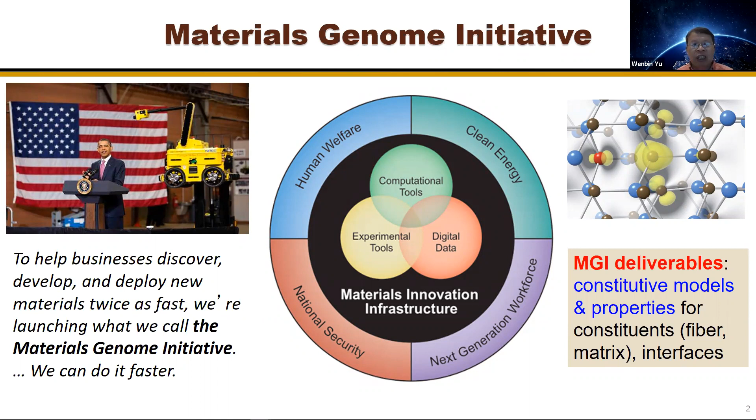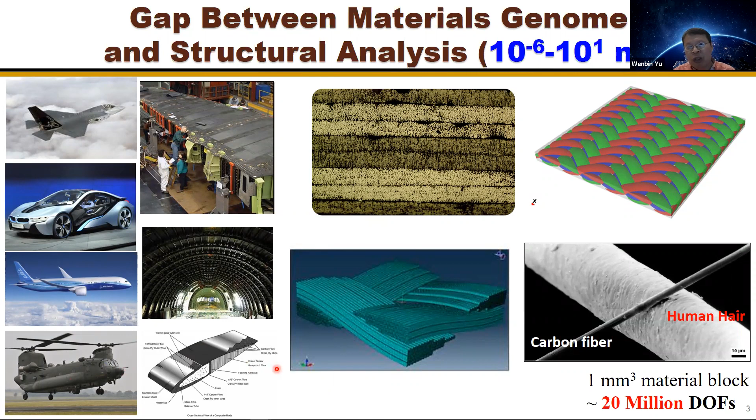If you're familiar with finite elements, it's even hard to cross two length scales. For example, for a 1 millimeter material block, if we want to capture fiber details, your element size cannot be more than the fiber. Then you're talking about millions of degrees of freedom. But here we need to cross many length scales, from micron to meters. And we also know that structure behavior is directly affected by how we engineer the fibers. So we need to find an effective way to bridge the gap between the materials genome and the structure analysis. Let me use an example.

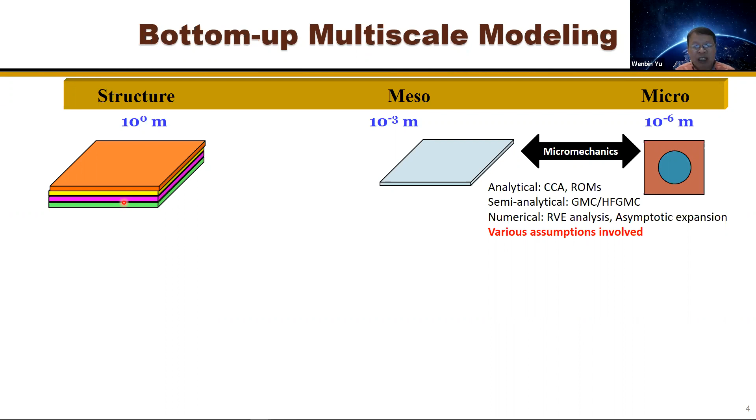Traditionally, for example, for fiber reinforced laminates, we have so-called bottom-up multiscale modeling. We start from some kind of unit cell idealized representation of the material mixture, then use certain micromechanics calculation, could be analytical, semi-analytical, or numerical, to get so-called nominal constants. Then use some structure theory, the most popular one is the classical lamination theory, to construct the structure theory, then do the structure design analysis. Both micromechanics and structure mechanics are two separate subjects, and we have all kinds of models there, and also various assumptions involved.

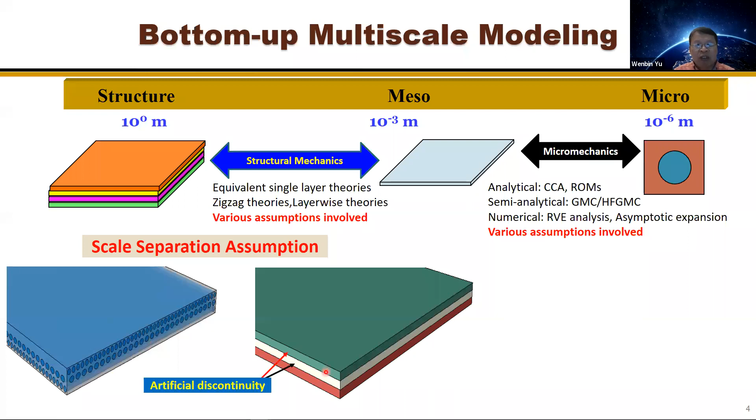And the more fundamental assumption is what I call here the scale separation assumption when you do this two-step micromechanics and structure mechanics. For example, you have a unidirectional fiber reinforced composite with perfect bonding. If you do it this way, basically you effectively replace the original structure with a structure made of 3 homogeneous layers. Then you shift the discontinuity interface. Originally the fiber and matrix interface now becomes the layer and layer interface. We create a so-called artificial discontinuity. It would be okay if the fibers are much smaller than each layer thickness, which is true for traditional prepregs.

We have about 20 fibers within the layer thickness. Then for the global behavior, stiffness, vibration modes and buckling, that would be okay. But it would not be okay to get the stress concentration because even the material discontinuity is different. And that's why for structural behavior, for stiffness consideration, the classical lamination theory does a good job there.

But when you go to damage and failure, because damage and failure is a local phenomenon, then we have difficulty to have a good prediction. And also for some situations, even the global behavior will be wrong. For example, we have a honeycomb in the middle, a sandwich structure with face sheets in terms of laminate.

Then the traditional way, if we use the bottom-up multiscale modeling, we take a unit cell, do a micromechanics calculation to get the material properties for that honeycomb. Then we treat it as a homogeneous layer to do a sandwich structure analysis. And it will have some issues even for the global behavior. The reason being that the size of the honeycomb is similar to the thickness of the panel.

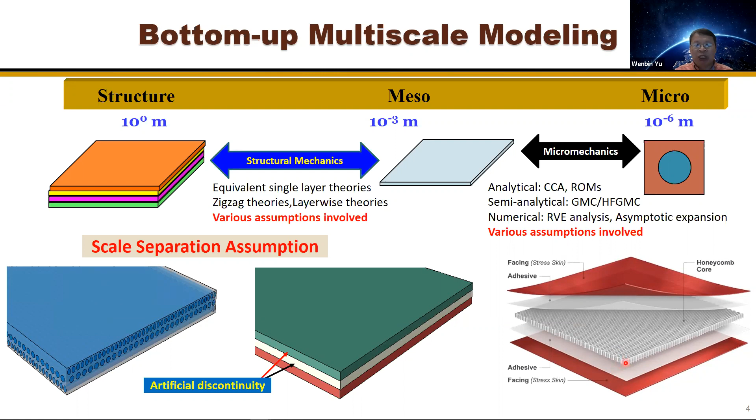So when the scale separation is not clear, it's not at the 3-dimensional material level, but at the panel level, which means the thickness and the size of the microstructure should be considered together to do the homogenization. And this kind of bottom-up thinking sometimes also confuses structure behavior and material behavior.

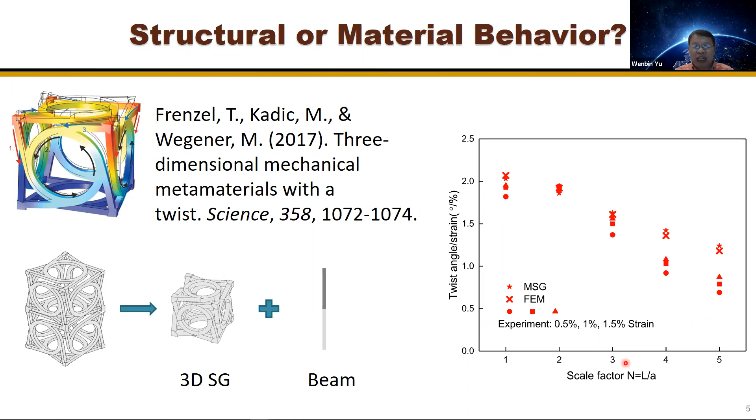So to avoid the issues associated with bottom-up multiscale modeling, I have been searching for a top-down modeling approach from the system perspective. Fundamentally speaking, for a structure, no matter how complicated it is, it basically comes down to structural analysis. It's a combination of 3D solids, if all 3 dimensions of that component are of similar size,

or plates and shells, if we know some component has 1 dimension much smaller than the 2 other dimensions, and also beams, if we have 1 dimension much larger than the 2 other dimensions, or thin-walled beams, if all 3 dimensions are of different orders of magnitude. And this is basically our mathematical idealization.

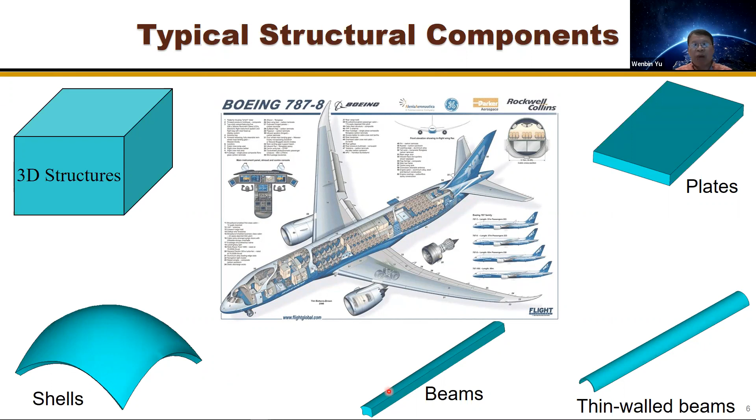When we do the analysis and design, we discretize them as a combination of solid elements, plate and shell elements, and beam elements. And what we have to realize is that this single line element could represent a box beam with each wall made of, say, 20 layers of woven fabric. And this 2-dimensional plate surface element here could be a stiffened panel with skins and stiffeners made of composites.

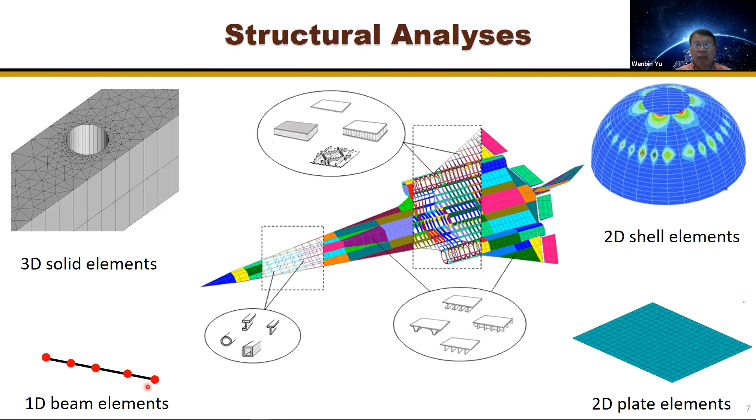And what we need to find out is how we can capture the behavior using this much simplified mathematical representation. And that is what we call the models. Behind each element, there is a corresponding model. If you're familiar with continuum mechanics, for each structure model we have 3 parts of equations: kinematics, kinetics, and energetics. Energetics is also called constitutive relations.

The kinematics and kinetics will remain the same, whether it's made of composites or not. What will be different is the constitutive relations. Here I only use linear elastic behavior for illustration, and it can go to nonlinear. What I have to point out is that for composites, particularly anisotropic heterogeneous materials, the stiffness matrix could be fully populated. For example, for beam theory, we all know EI, GJ, EA, these kinds of beam constants.

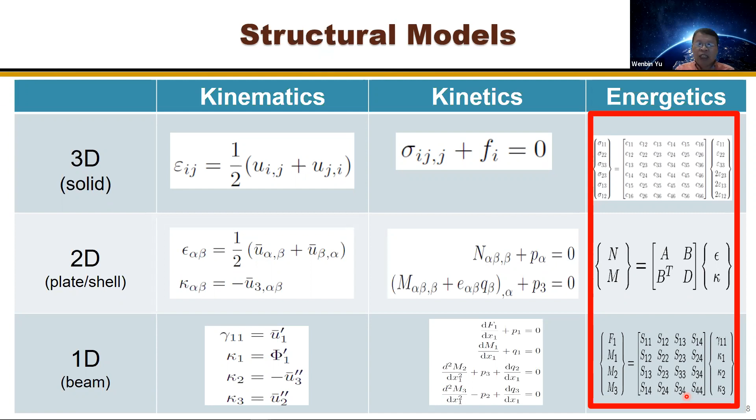But for a composite beam, we could have a fully populated stiffness matrix. All the deformation modes could be coupled. So composite modeling should focus on the constitutive relations. And the way to find the constitutive relations is what I call constitutive modeling, because kinematics and kinetics have already been implemented many times in commercial finite element codes. So the mechanics of structure genome is what I proposed as an alternative to traditional multiscale modeling.

What we do is first we decide what kind of model I want to use to describe my relevant structure behavior I want to capture. Then I decide at which level I characterize my material. Then we need to come up with some method, what is called here mechanics of structure genome, to minimize the information loss between these 2 representations. And some of the theories we developed are implemented in the code called SwiftComp.

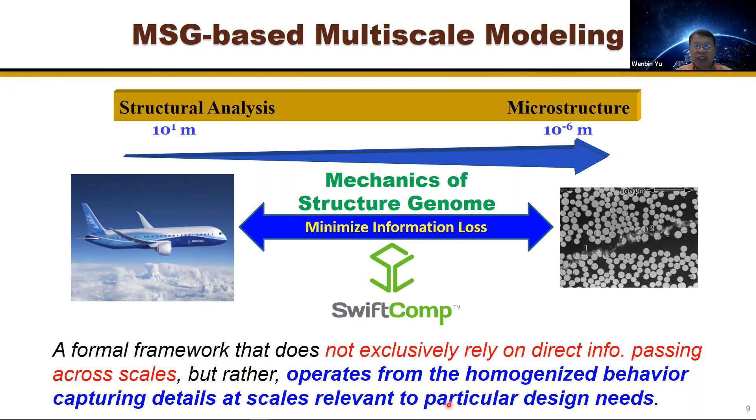It is a formal framework that does not exclusively rely on just direct information passing across scales, but rather operates from the homogenized behavior, capturing details at scales relevant to the particular design needs. This flowchart shows the MSG-based multiscale modeling. We start from the 3D continuum mechanics model. First, we identify the structure gene.

Then we use the principle of minimal information loss to mathematically decouple the original problem to a constitutive modeling over the SG and also a structure analysis. The constitutive modeling over SG produces the constitutive models for the structure analysis. The structure analysis usually has been done by standard finite element codes like Abaqus, Nastran, and ANSYS. Then structure analysis gets the global behavior: vibration, buckling, deflection, all that.

But what we want to find is how the material feels. Then we need to go back. There is a so-called dehomogenization procedure. We still get the relationship from the constitutive modeling. Doing a dehomogenization, we will find out what happens within the material, within the microstructure.

Then you'll find out that to use this method, there are 3 questions we need to ask and answer. First, what would be the macroscopic model? That depends on design need and how the structure looks. For example, for a helicopter rotor blade, you want to use beam elements to represent the composite rotor blade when you do a dynamic simulation.

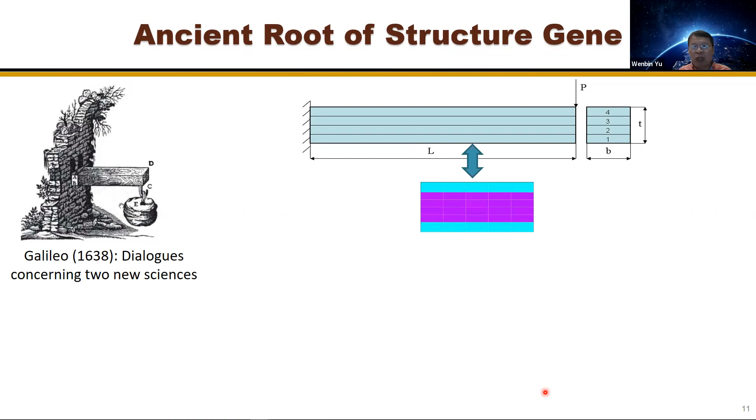How do we deal with beam theory? We know all the structures in our 3-dimensional space are 3D solids. We start from the 3D structure. We basically look at the cross-section, traditionally make some assumptions, then do some cross-sectional calculation to get the beam constants. Then we reduce the original problem to a set of ODEs to do the analysis. For example, this is the deflection, the bending analysis, for the global beam analysis.

After we've done that, we don't stop here. We do this analysis, we get displacements, rotations, and the forces and moments, bending moment diagram, shear force diagram. If we want to say whether the material is strong enough or not, we use a formula like this. Everybody knows this formula to get the stress, to check the maximum stress against the design allowables. So that's the procedure we all know.

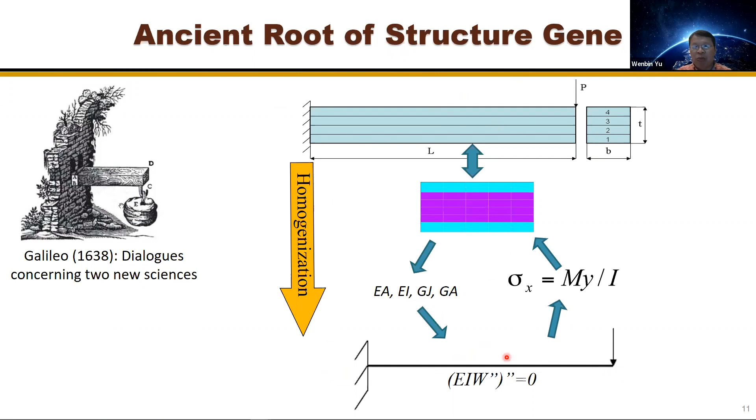If we talk in terms of the language of MSG, then basically the way we calculate the beam constants, EI, GJ, that's a homogenization procedure. The original model is a 3-dimensional model, and the macroscopic model is a 1-dimensional model. We want the effective properties, that's homogenization, and we get the global analysis here.

And then the way to get sigma, the stresses, is a dehomogenization procedure. We go back to the SG, or you can call it the microstructure, to get the local fields or distribution over the cross-section. And this shaded area is what I call the constitutive modeling.

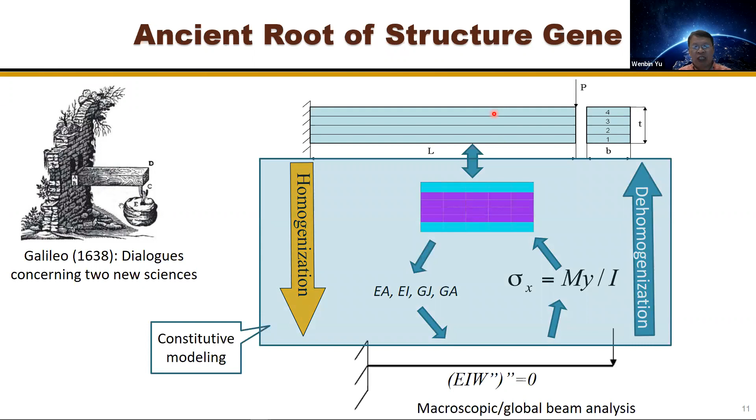So next, let me show the basic steps of MSG to construct a theory. It's very simple. We only need to follow 3 very basic steps, because we're thinking in terms of 2 models. We have our original model as the starting point, but that's too complex and too expensive to work with. We want simpler models. That's basically what multiscale modeling is about.

The first step is to express the kinematics of the original model in terms of that of the macroscopic model. So the displacements can be expressed in terms of, say, the displacements and rotations of the beam model, right? And then you can get the kinematics.

The strains of the original model can be expressed in terms of the beam strains and curvatures, and also some unknown function. Usually in micromechanics, we call it the fluctuating function. Then we express the information of the original model. If we're dealing with linear elastic behavior, we're talking about total potential energy. So we express the total potential energy of the original model in terms of the kinematic variables of the model I want. You still have the unknowns.

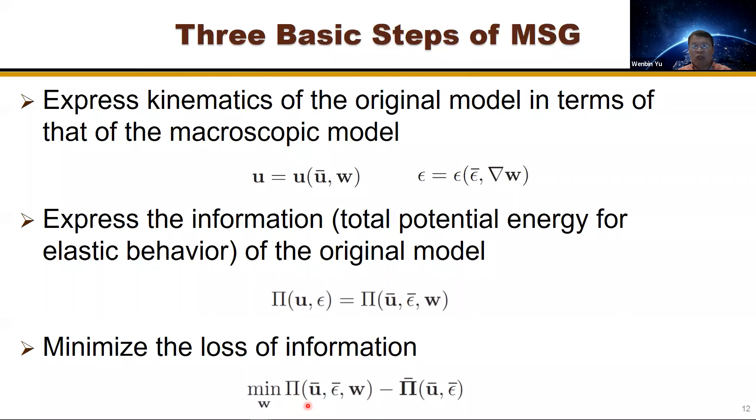How do we find that unknown? To minimize the loss of information between the information of the original model and the information of the model I want. Then you minimize it, then you will find out the unknowns. Then you solve the problem. You have the exact relationship between these two models, without really a lot of the ad hoc assumptions we have involved in structural mechanics and micromechanics.

So now let me illustrate more about the structure gene concept. For example, for 3D analysis, it depends on your material makeup. It could be basically a binary composite made of layers, but it's a 3D solid. You want to do a 3D analysis. Then your structure gene will be just a normal line with the segments indicating how many phases you have through the thickness. If you only have this binary composite made of 2 layers but repeating, then you only have 2 segments there.

If you have unidirectional fiber reinforced composites, you're dealing with a 2-dimensional domain. Remember, it's the smallest mathematical building block, because I can take this 2-dimensional domain, extrude along the fiber direction to build that slice, then sweep along the layer direction to build the entire layer, then build through the thickness. So that is the smallest mathematical building block. If you indeed have 3-dimensional heterogeneity, then you have to deal with a 3-dimensional domain. And that's a similar concept to the RVE, but I will tell the difference between this and RVE.

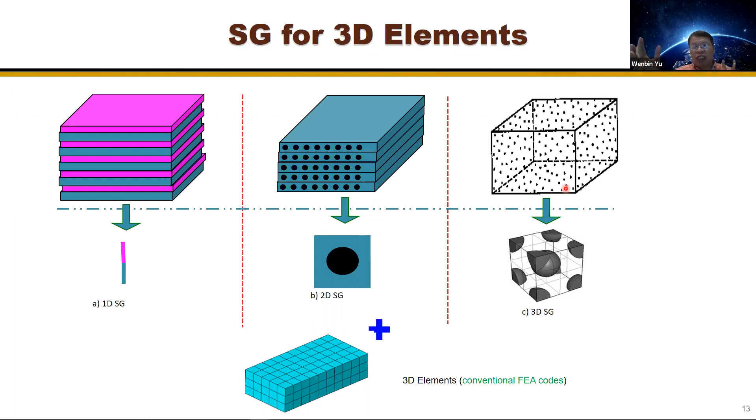And we carry out this 1-dimensional, 2-dimensional, 3-dimensional analysis. We will get the constitutive models. For example, if linear elastic, we'll get a 6x6 stiffness matrix for the structure analysis. After you've done the structure analysis, we can carry out the dehomogenization to get the detailed stress distribution within the original material. So this is kind of like a generalized computational homogenization method, but much more powerful than the RVE analysis, particularly for some of you, if you're familiar with RVE analysis.

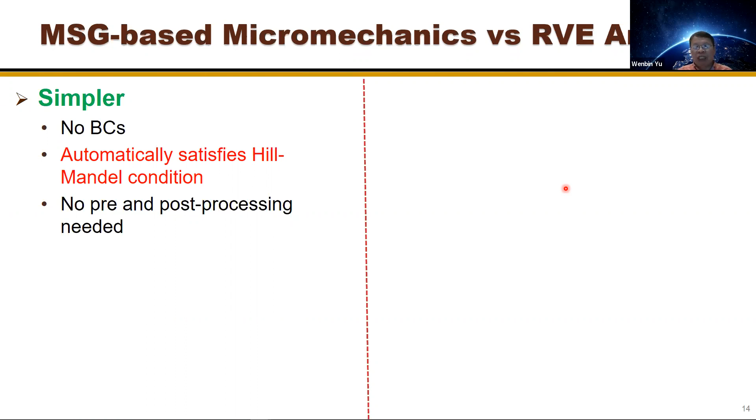I did a comparison. First, the users don't have to apply the boundary conditions. When you do RVE analysis, the most challenging part is to apply the correct boundary conditions. And also, our theory automatically satisfies the Hill-Mandel condition, and we can prove that. And also, there is no pre and post processing needed. For RVE analysis, we take a block of material, apply the right boundary conditions in terms of tractions and displacements, then we do a stress analysis, right? Then we average the stress, average the strain, and calculate the material properties. That's what I call the pre and post processing.

And it will be faster because it's semi-analytical; we had many examples showing that this method converges faster than the RVE analysis. And also we have the capability to compute 3D properties and 3D stress and strain fields out of a 1-dimensional, 2-dimensional, or 3-dimensional SG. For example, people also take a 2-dimensional domain to do RVE analysis, but they can only get the in-plane properties, and they can only get the 3 stress components. This method can compute the complete set of 3D properties using one analysis.

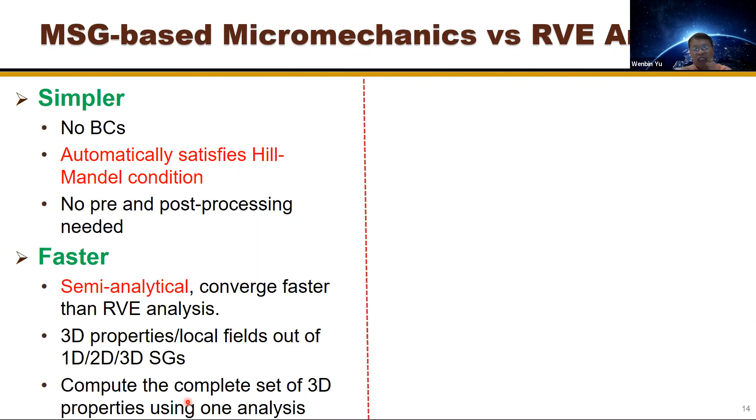We directly compute the stiffness matrix, or tangent stiffness matrix for nonlinear analysis. Not like RVE analysis, where you apply a certain set of boundary conditions, do a calculation, get the material properties in that direction, that column, then do another analysis to get it in another direction. We only do one analysis. For example, for the fiber reinforced composite, if you look at a lot of other multiscale codes, they will have this picture showing how they do their RVE analysis. But if you use MSG, this 2-dimensional domain will be sufficient, and we will generate the same result.

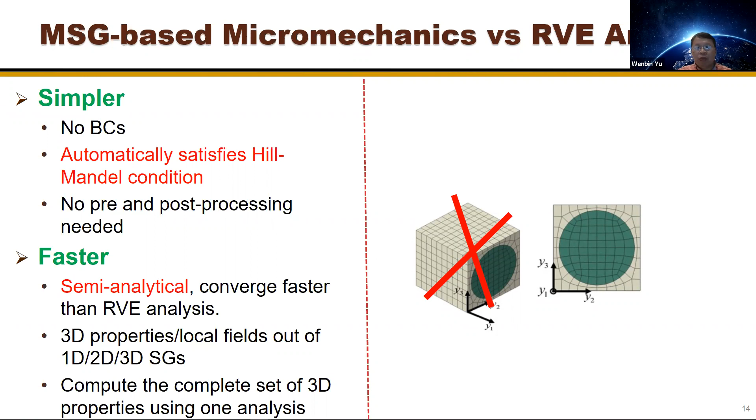And it's also more versatile; it's a single theory for all heterogeneous materials: periodic, partially periodic, or aperiodic. And also, it does not have to be a rectangular shape. It can be an arbitrary shape, depending on your material. You may have this kind of microstructure. And we find that for 3D periodic materials, it will achieve the same accuracy as RVE analysis and asymptotic homogenization, if you've heard about it. But for partially periodic or aperiodic materials, it will always achieve the best accuracy, because we use the principle of minimal information loss; we make sure that the homogenized model and the original model have minimal information loss.

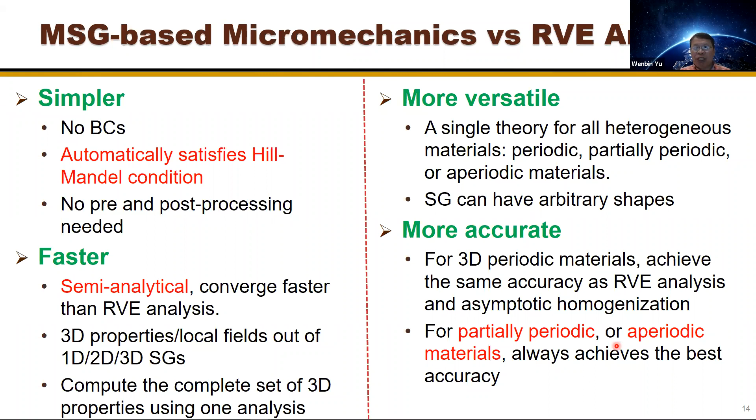And I have a simple illustration here. Usually this is not done through the traditional micromechanics lens, but if you view this problem using MSG, actually that's a micromechanics problem, the black aluminum approach.

We treat a stack of laminates as a homogeneous material, kind of like a black aluminum. Then the conventional approach, how they do it, they basically use the classical lamination theory to get the A matrix, then get your in-plane properties. Then for the out-of-plane properties, they do various assumptions through the thickness, then calculate the transverse Young's modulus, Poisson's ratio, CTEs.

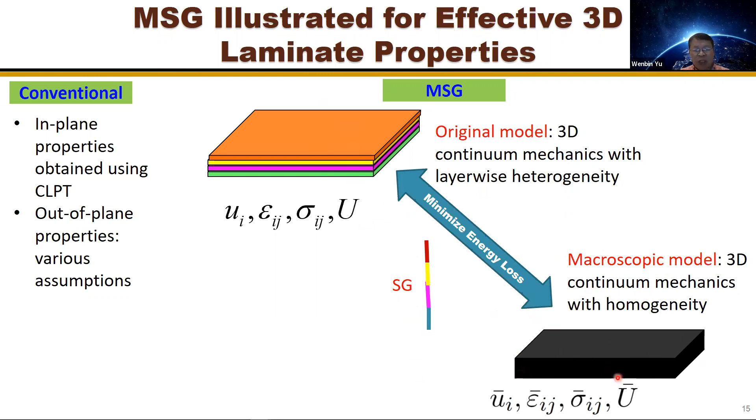And if we use MSG, we need to answer the question, what would be the original model? Our original model would be 3D continuum mechanics with layer-wise heterogeneity. And the model I want is a 3D continuum mechanics model with homogeneity. And the structure gene I have is the transverse normal line. That's basically what I have, because I can use this to build the entire structure. Then we minimize the energy loss. We can get the full set of the 3D properties for this homogeneous material without making various assumptions.

How about when we have a structure like a panel that also has a lot of heterogeneous details, and we want to analyze it using plate and shell elements, say for example a bending problem or buckling problem? Then it depends on how this structure is made. If it's made of homogeneous layers, then the SG will be the transverse normal line, because that is my smallest mathematical building block. I can use this line, sweeping in plane, to build that three-dimensional structure. If we have heterogeneity along one of the in-plane directions, I'm dealing with a two-dimensional domain. If I have heterogeneity along both in-plane directions, I deal with a three-dimensional domain.

What I want is the plate models for the plate analysis. If you're talking about the simple plate element, you're talking about the ABD matrix as input to do your structural analysis. So out of this one-dimensional, two-dimensional, or three-dimensional calculation, we will get the ABD matrix. Then you do your plate analysis, then you go back and get all the stress components you need within the original structure.

And there are a few things I want to point out. First, this method provides a uniform theory for all panels. Here I only use plates, but shells also can be done in a similar way, no matter whether it's sandwich or laminates or corrugated structures or stiffened panels. In the literature, people have different theories, but here it's treated uniformly.

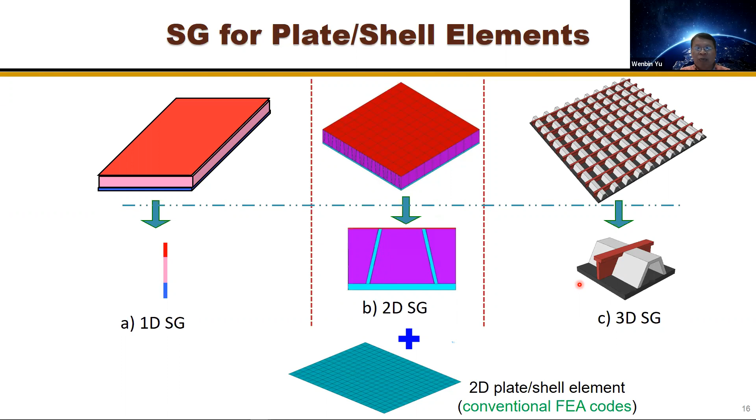For example, I still use the same problem, a stack of laminates. Now I know that if I treat it as black aluminum, I cannot take care of the flexural properties, the bending. So what I do, I want a plate model. Your starting model is the 3D elasticity model with layer-wise heterogeneity. Your end model is a two-dimensional classical plate model. And your structure gene is still the transverse normal. And you minimize the information loss. At the end of the day, you will derive this model with the plate stiffness.

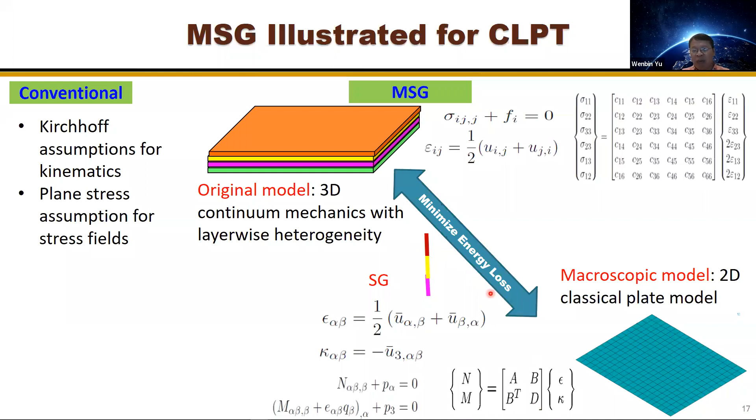Traditionally, we take the Kirchhoff assumption for kinematics, basically generating a plane strain situation. Then we do a plane stress assumption. Instead of using C, we use Q, right? Sigma ij equals Q ijkl epsilon kl. But we do know that plane stress and plane strain cannot exist at the same time; they contradict each other. For this method, we don't have to make that assumption. We just need to minimize the loss of energy between these two models.

How about if we have a very long structure, for example, helicopter rotor blades? If we have a uniform cross-section, or the blade can be considered as formed by piecewise uniform cross-sections, then the structure gene will be the cross-section. And if we also have heterogeneity along the spanwise direction, we're dealing with a three-dimensional block. What we want is torsional stiffness and bending stiffness for my beam models. So that will be done at the one-dimensional level.

After we've done the beam analysis, we can do dehomogenization to get the stress distribution over the cross-section or over this three-dimensional SG. And again, if you have a structure that is very long and you want to model it as a beam using beam elements, then this method will help us produce the right beam constants for you to use, and also recover the local fields to generate the three-dimensional stress.

And as I said, plate and shell theory, and also beam theory, is a very traditional structural mechanics theory. But if we view this line as a one-dimensional continuum, then for every material point on this line, you have a corresponding microstructure to generate the effective properties. They are effective beam properties, and also help us to generate the local fields. So the beam theory also becomes a special application of micromechanics in that sense.

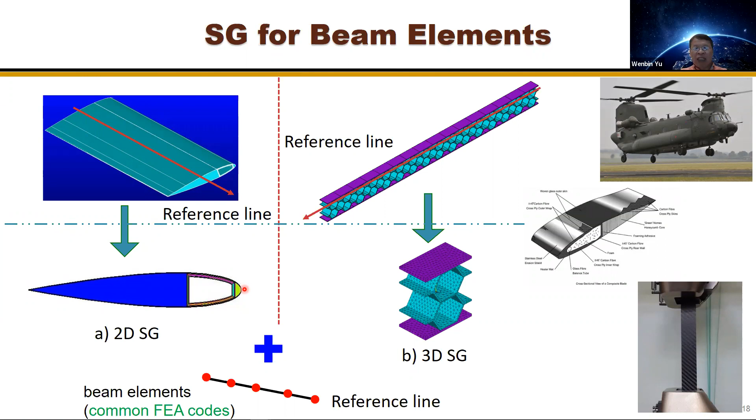And some of you, if you have been following my work, know I actually started with beam theory when I was a PhD student at Georgia Tech with Dewey Hodges, solving the helicopter rotor blade problem. So on beam theory, basically, we worked a lot. We almost completely solved the problem, actually, because it has been funded by the U.S. Army since 1988. We are still funded by them to basically make it into their framework. Later, I will mention it, into their framework to do the design. And it now becomes the tool of choice for the helicopter industry and the wind turbine industry.

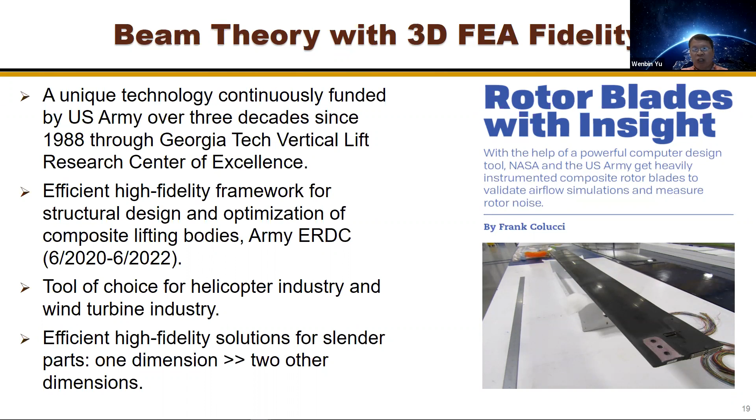It also provides a very efficient and high fidelity solution for very long parts, cylindrical parts, as long as we know one dimension is much larger than the two other dimensions. This is a very recent article. They used our tool to design a blade for NASA. That's about the theory. Now let me show a little bit of applications.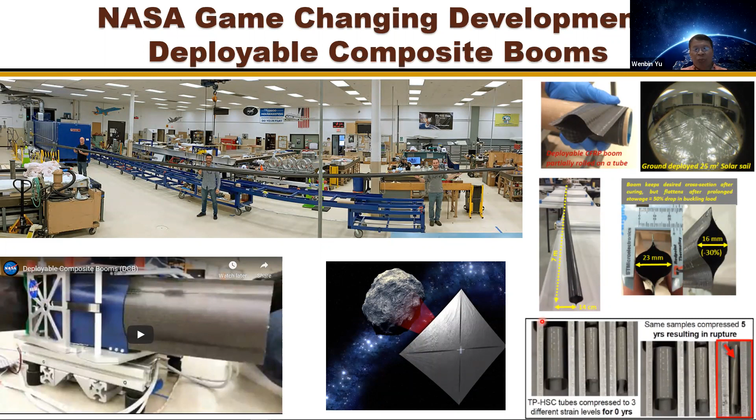Current active projects apply this method to various types of structures. So the first one is the NASA Game Changing Development, that is deployable composite booms. And you can see that it's a very long structure, and when it's deployed, basically it behaves like a beam. But when it's stored, they are basically plates and shells contacting each other. So that's from the structure perspective. But if you look at the details, it's made of composites, woven composites, simple composites, and viscous behavior is important, damage and loss of energy is important, and also distortion is important. Supposedly after you deploy it, it must be straight, but if it's not straight, then the effectiveness of your space structure will be affected.

And we came up with a multiscale approach to tackle this problem. We can start from the fiber and matrix. The viscous effects really come from the matrix, and go step by step there. And at the end of the day, because the structure is so thin, when they do the characterization, they use the column bending test to test the bending and curvature behavior. And what we want to compute is this bending behavior in terms of fiber and matrix. And that's a simulation we did for their CBT, kind of like a virtual twin of that test, virtual testing from that perspective.

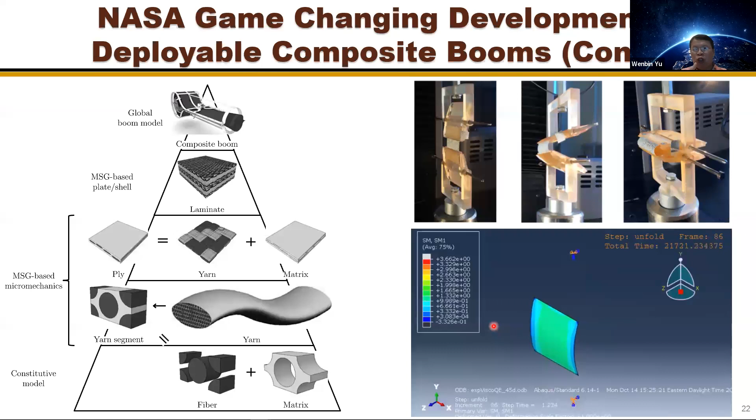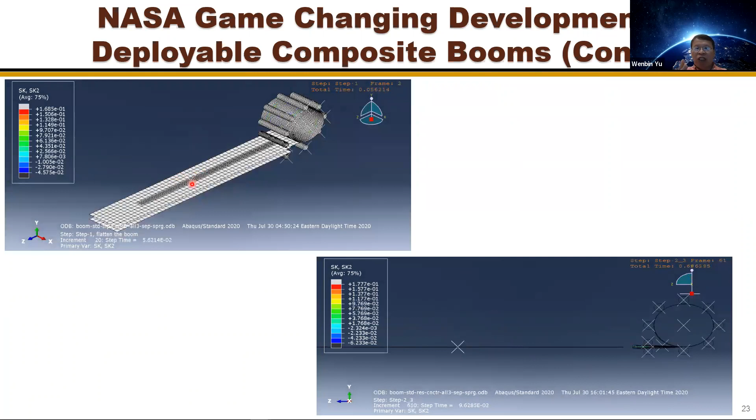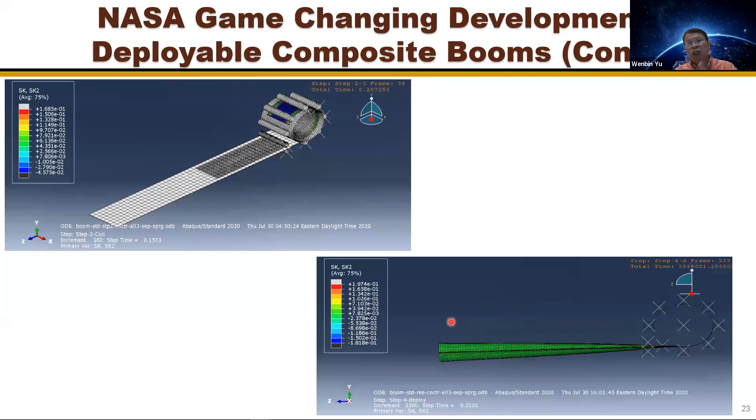We also did a simulation of the entire process in terms of the rolling, storage, and also deployment. The deployment is a little bit slow here, and we will wait for a minute. So what we did is, in terms of the fiber matrix properties, we can compute the nonlinear plate and shell stiffness, then treat it as a UMAT, then put it into Abaqus to do the simulation. For the elements, we still use Abaqus shell elements. And this is deployment. And I think this kind of digital model corresponding to the real test or the real structure can be very valuable to explain things and also to reduce the number of experiments we need.

And there's another one. This is very new. If you look at multiscale, there is an inherent problem. Basically, at the global level, the material is treated as a point. But we know that the RVE or SG is not a point. It has a finite size. So because of that reduction, we always need to implicitly assume so-called local periodicity. At one point, in the neighborhood, you should have similar RVEs repeating. Otherwise, it's not a material. You cannot use RVE analysis. But we do have situations where we don't have this nicely arranged RVE repeating everywhere. And a lot of the time, basically, the heterogeneity is everywhere, and they are different.

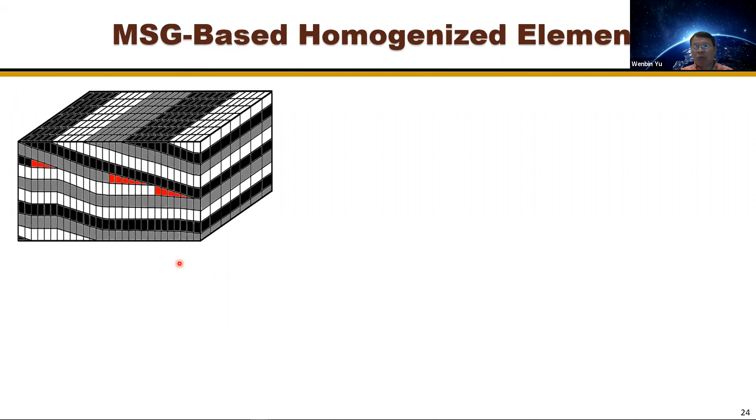For example, the composite flex beam has a lot of ply drops, and we need to get detailed stress. And if we do a detailed FEA analysis, it's impossible. A flex beam is pretty thick. You have hundreds of layers. If you want to get accurate stress, you need quite a few solid elements per layer to do the analysis. A certain type of multiscale is needed, but the RVE does not exist, or the SG doesn't exist. We don't have the so-called smallest mathematical building block. So we came up with the idea: how about homogenizing that block of heterogeneous material into a homogeneous solid element.

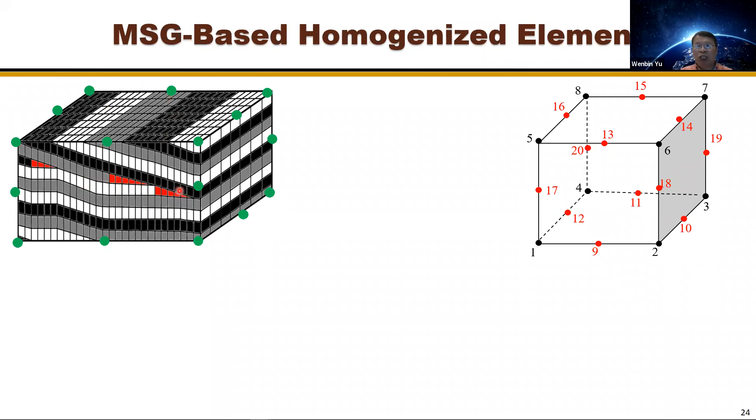This element is a global element I used in the global analysis, but it contains all the heterogeneity. So basically, this is my original model. We still can reason using MSG. This is my original model: the heterogeneous system discretized with many elements. And this is my macroscopic model. It's a single homogeneous element. Here it's a 20-node solid element.

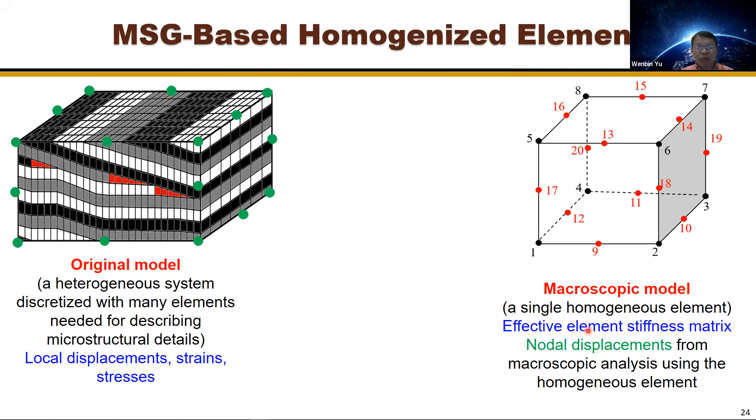I want the effective stiffness matrix so that I can do the simulation to do the global analysis. But this will help us to get local stress and strains. Then I can do homogenization to get the effective properties. For this purpose, it is the effective element stiffness matrix. It's not a material stiffness matrix anymore. For example, for a 20-node element, you're talking about a 60 by 60 stiffness matrix.

And after you've done the global analysis, you do a dehomogenization and get all the local stress within the original material. You apply your failure, whatever local buckling criterion at that level. So what we need to do is minimize the loss of energy between these two systems. I had a few equations, but I will not bore you with this. Basically, still the same idea, express displacements in terms of the displacement of the macroscopic model. For this purpose, now it's the macroscopic nodal values.

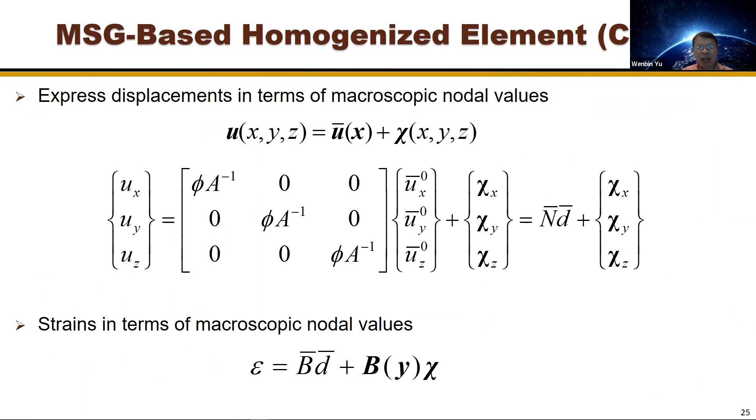And I have some unknowns, then I can get the strains, and then I can write out the strain energy of the original heterogeneous system and express it in terms of the nodal values of the homogeneous system. And I can minimize the energy loss, then solve for the unknowns. And here, of course, we need to apply some constraints. Constraints first for the macroscopic nodes, these nodes here, because that's the global element. And the real displacement should be the same as what we calculated in the global structure.

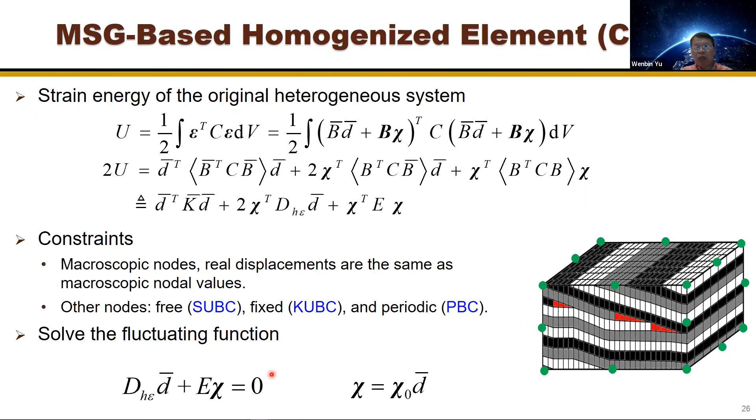And then for the surface, these nodes are not captured in the global analysis, so there are several ways to apply it. It depends on your situation. If it's a stress-free, free surface, then we should let it free. If it's connected with another surface, we need to use the so-called periodic boundary condition. In such a way, we allow it to vary in certain fashion in terms of the global nodes and also shape functions, so you have additional flexibility there. After we do the minimization, we solve a linear system.

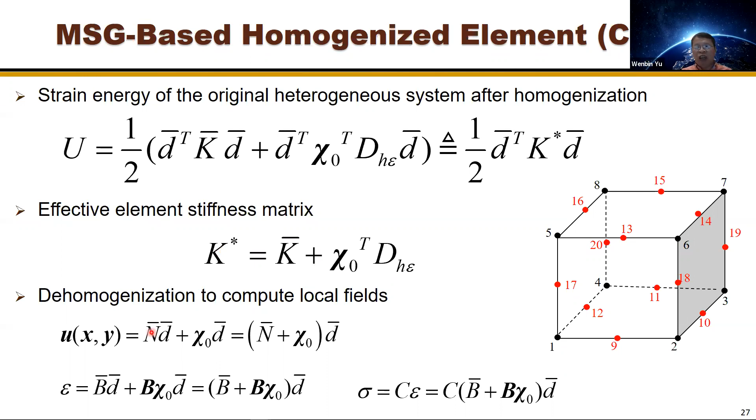Then plugging it back into the energy, we'll find this energy of the heterogeneous system expressed in terms of the global nodes. And that is the 60 by 60 stiffness matrix I'm talking about. After you have the effective element stiffness matrix, you can use the user element in Abaqus, put that stiffness matrix into that user element, then you can carry out your analysis. After your analysis, you will get the global nodal values. You can go back to do the dehomogenization and get the local stress and strains.

And we did a very simple example, a three-layer composite cantilever beam. We have a complex loading at this end and it's cantilevered here. It's made of composite resin and some isotropic material. Of course, this is simple enough; we can use hundreds of thousands of elements to do the three-dimensional analysis. We can also simplify it by using 40 MSG-based UELs only. So I take a chunk of material here to compute the effective stiffness matrix, and because they have the same makeup, the homogenization only needs to be done once. Then do the global analysis, then the dehomogenization to get the stress.

And we know that when we do this homogenization, usually we cannot handle the boundary very well. What we can do is keep the boundary using the original discretization, and only replace the middle part with this new user element. Now I have 32 MSG-based user elements and also these regular solid elements. For the results of this problem, we did a DNS, which meshes everything with a very fine mesh. Pure UEL means 40 UEL elements. Partial UEL means the two ends are the DNS part and the middle is UEL.

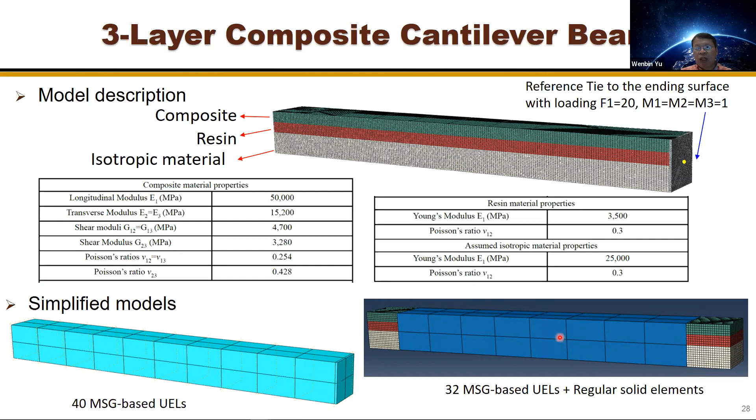And the results I take are here, very close to the boundary. Actually, if I take it close to the boundary, then they are the same, but pure UEL will be very different. I take this section here, close to the boundary but already homogenized. We find that pure UEL does a good job, but not for the very small transverse stresses. For the in-plane stresses, both approaches work okay. But the transverse stresses, although small, could be very important, for example for delamination. And when we use the partial UEL, it's significantly improved.

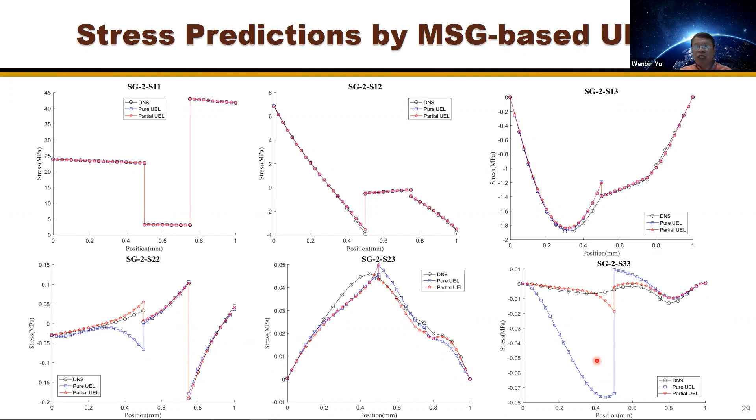It's very close to the DNS, but the pure UEL has a pretty significant difference. So this method really works pretty well, and we are happy about that. And also another issue about multiscale modeling is, when you look at that, we can link from fiber to the structure behavior. That's good and cool.

But if you look at our inputs, we need fiber and matrix properties and the failure criteria and also the microstructure. Those are the assumptions. And usually it's very difficult to measure the full set of fiber properties, right? And also when we do that link, although the structure analysis is pretty efficient, the multiscale analysis is still pretty expensive. Although our theory basically came up with the most efficient approach, it's still time consuming.

So there are a few limitations: computing time and the unknowns of the constitutive models and properties for the constituents and interfaces, and the geometry and topology of the microstructure. That's where machine learning can help us. It will help us reduce the time: we do scientifically guided physics-based multiscale modeling, then construct surrogate models trained by machine learning. That's most of the machine learning work others have been doing, basically coming up with a better surrogate based on data. Data could be high fidelity physics-based simulations.

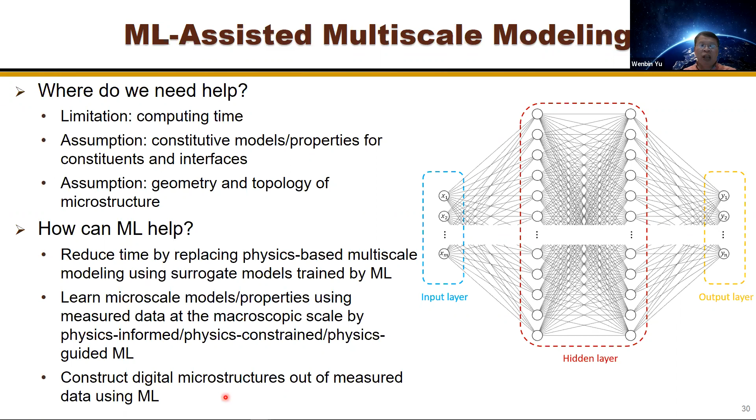Secondly, to learn these microscale models and properties using measured data, but measured data is not at that scale, but at the structure scale. And we can use physics-informed or physics-constrained or physics-guided machine learning. Also, we can construct the digital microstructure out of the measured data using machine learning. So we have been focusing on understanding the unknowns, particularly the failure criteria. We have Hashin, Tsai-Wu, but they are all assumed. They may fit a bunch of data, okay, but their predictive capability is very limited.

So what we do is, based on the experimental data, we try to link the system from the experimental data. And we link in such a way that if we know there is existing physics, I will use a physics model to link. If not, then I will use an ANN, artificial neural network, to link it. We could have multiple ANNs and also multiple physics models. Let me use a very simple system to illustrate. For example, I did an experiment at my laminate level. I want to figure out the failure criteria at the lamina level.

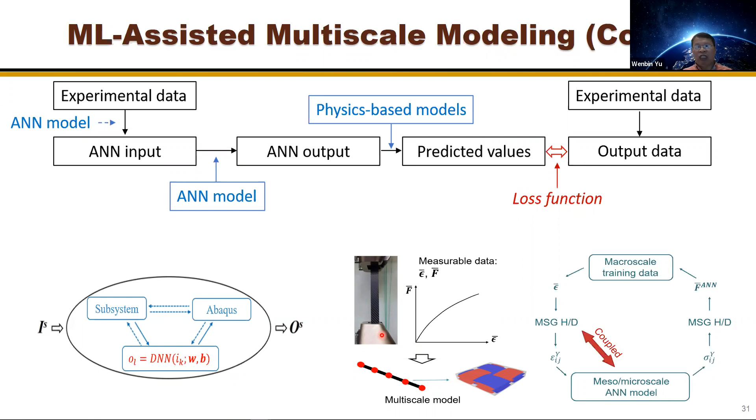Usually I can have some kind of UMAT that plugs into Abaqus if I know my failure criteria. If it isn't implemented in Abaqus yet, then I will implement it as a UMAT. Then I can do the simulation and match the experimental data. What we are doing here is that I try to replace that UMAT with the ANN, the neural network, to be trained by the data measured at the global level. That is the case because we don't know the UMAT. I don't know the failure criteria. So it's a black box, the ANN.

Basically what we did is that we take this machine learning TensorFlow kind of package apart, and use what we needed. So we express the constitutive relations using a neural network. We don't know it, it's a black box, a free-form assumption, if you want to call it. There are weights and biases. That's what we need to determine by system level measurements. So system level measurements are passed through Abaqus, and there are sensitivities, so basically Abaqus and the ANN should constantly communicate with each other so that we can train the model.

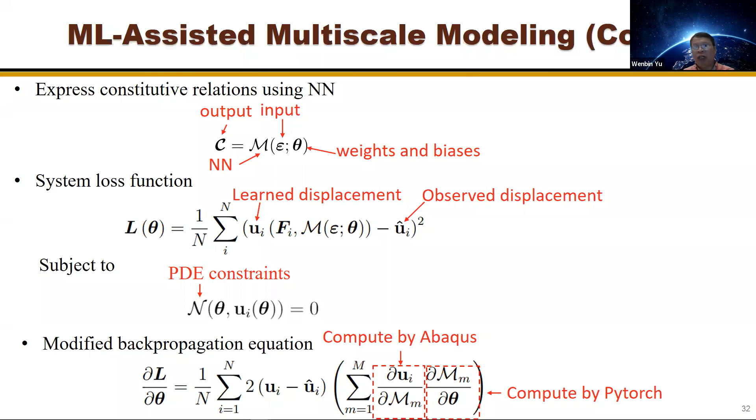We had an example, and basically this is our true model. It's a built-in damage model in Abaqus. We did a laminate and a simple loading system. We say, can I learn this damage model using this system? It's ad hoc anyway, but I treat it as a true model. I want to learn that model. So I do a test at this level and observe force and displacement at certain points, and use that data to train my ANN. I replace this with an ANN, so I don't know this, okay?

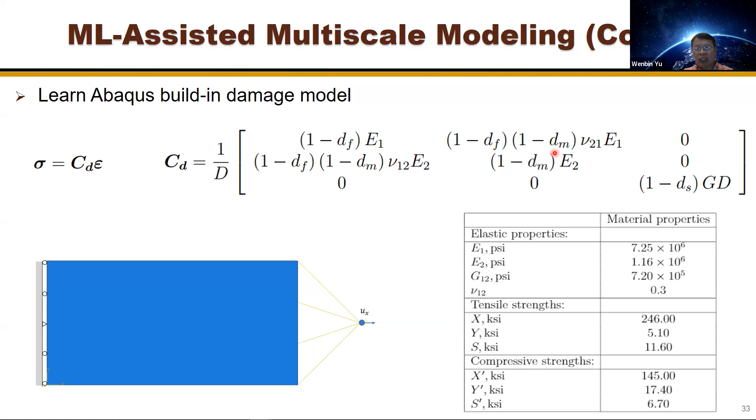If you look at the model, you will find that in the flexibility matrix, this term actually is not damaged at all. So that's why that is happening. This system can not only predict the nonlinear force and displacement behavior, we can also generate the nonlinear stress-strain curve.

Although we don't have a mathematical formula to describe it, this becomes a trained model, and that trained model can be used as a UMAT for engineers to do the design, particularly for their material.

And since we are basically focused on method development and tool development, we also take technology transfer very seriously. If you're interested, and if you know cdmHUB, we made our code available on cdmHUB. You can just log in, and then on any computer, you should be able to carry out those analyses I just mentioned pretty easily. You can even do it on your smartphone if you want.

We have one code called Gmsh4SC. We integrate our code with Gmsh. It's for general microstructure. You can do honeycomb and sandwich structures and all that. And we also integrate our code with TexGen. We can deal with textile composites and call SwiftComp to do the homogenization and dehomogenization.

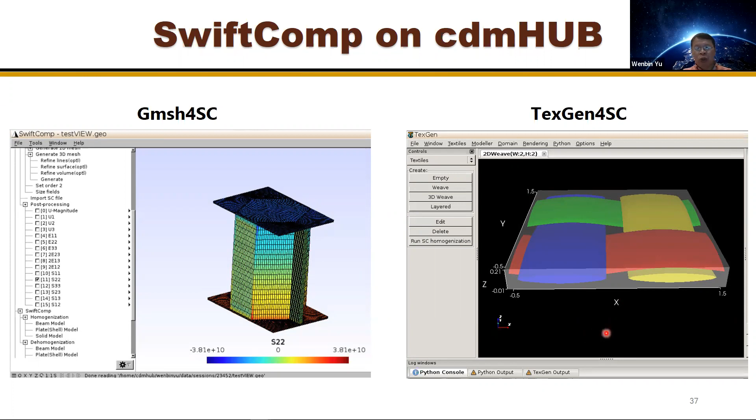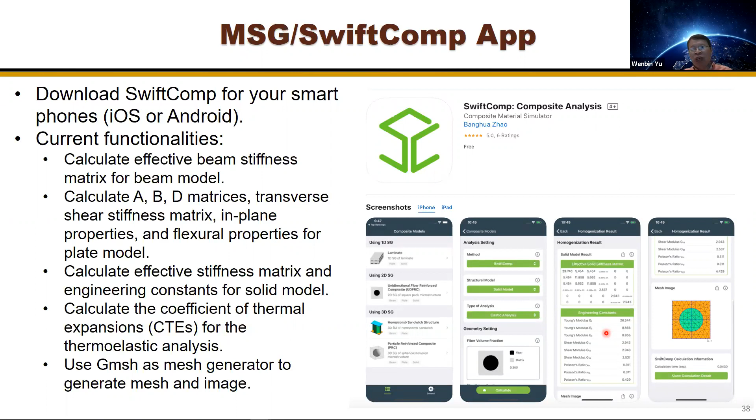We also create apps for students, for people who might be interested, on iOS and Android, and we have the capabilities. You have the interface on your phone, but actually the back-end calculation is connected back to our server at Purdue. And I mentioned what we are doing with the Army right now, they call it the Galaxy rotor design system, and this is our part.

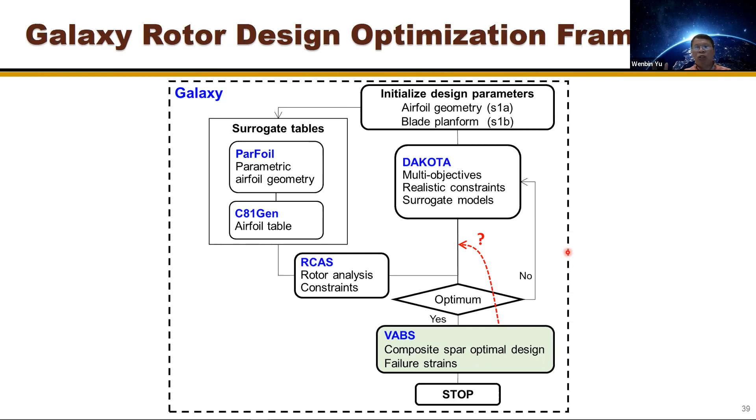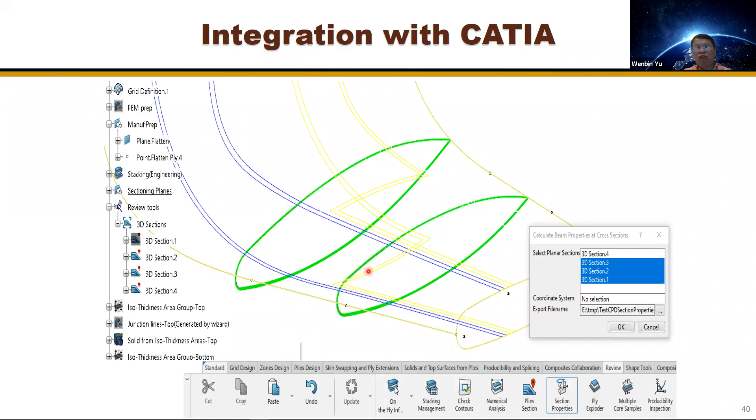What they try to do is a digital engineering system they have right now. They want to have all the components for the helicopter design linked together, and this is one of the works. And also we integrated with CATIA. When you do the aircraft design, you have a wing and you want to get the elastic axis and torsional stiffness of that section. You can cut a cross section, then invoke our code to get the sectional properties.

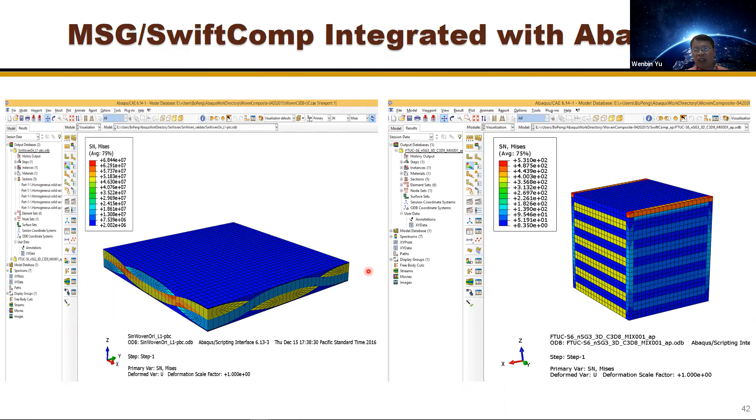We also integrated with HyperMesh and OptiStruct. That's available now through the Altair Partner Alliance, APA. OptiStruct is their optimization code, if you are not familiar. It's a pretty good one. And we also integrated with Abaqus. We have this capability enabled for Abaqus so that you still take advantage of the traditional finite element analysis capability of Abaqus, but with the multiscale constitutive modeling capability provided by MSG and SwiftComp.

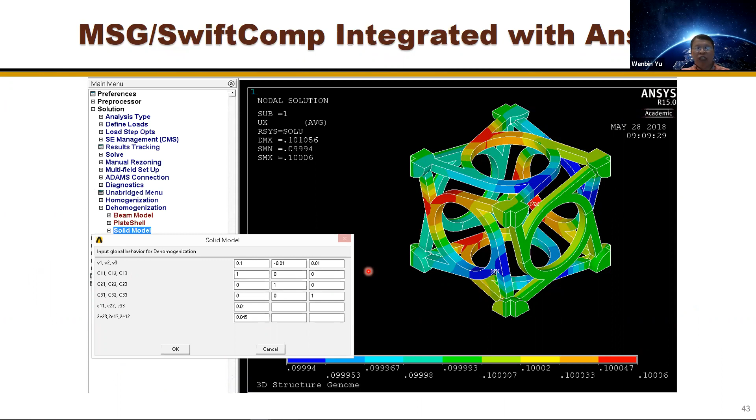We also integrated with ANSYS. If you are an ANSYS user, you have this capability through classical ANSYS or Workbench. And we also integrated with Nastran. You could have all these material systems and still use traditional Nastran elements.

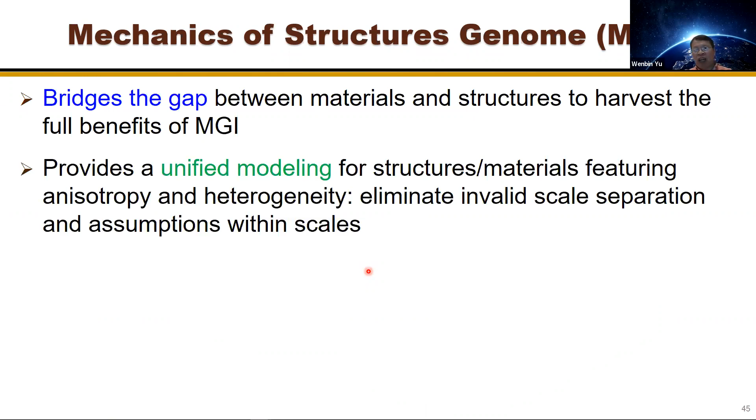So in conclusion, the mechanics of structure genome bridges the gap between materials and structures to harvest the full benefits of the Materials Genome Initiative. It provides unified modeling for structures and materials featuring anisotropy and heterogeneity. It can eliminate the invalid scale separation assumption and also assumptions within scales. And we can achieve DNS accuracy with the efficiency of simple engineering structure models.

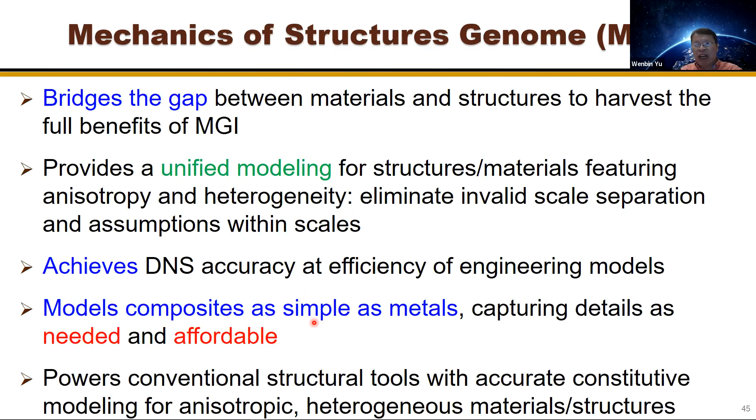And it enables us to model composites and, in general, heterogeneous and anisotropic materials as simply as metals, capturing details as needed and affordable. You as an engineer do need to decide where you start and where you end. It can power conventional structural tools with accurate constitutive modeling for anisotropic heterogeneous materials and structures. And last but not least, this method unifies micromechanics and structural mechanics for multiscale constitutive modeling.

In this book, The Creative Aspects of Science by Jacob Bronowski, he mentioned that the progress of science is the discovery at each step of a new order, which gives unity to what had long seemed unlike. Faraday did this when he closed the link between electricity and magnetism. Maxwell did it when he linked both with light. Einstein linked time with space, and mass with energy. So science is nothing else than the search to discover unity in the wild variety of nature.

And for us, this MSG actually provides a new order, a new way to tackle all kinds of structures in a unified way. And I'm pretty satisfied with the academic value of this methodology. This is the last chart, as a kind of summary, of all the SGs we tried before. We have tried many others.

You can see that the SGs can be arbitrary shapes, can be 3D woven, can be metamaterials, can be short fiber systems, and can be curved. It can be used for virtual testing of materials. We showed the CPT test, right? It can get the mechanical properties or multifunctional properties, and also be used as a component for the multiscale modeling of structures. And as we mentioned, we deal with all types of structures: regular composites, different structures, built-up structures, and sandwich structures. So that's all I have.